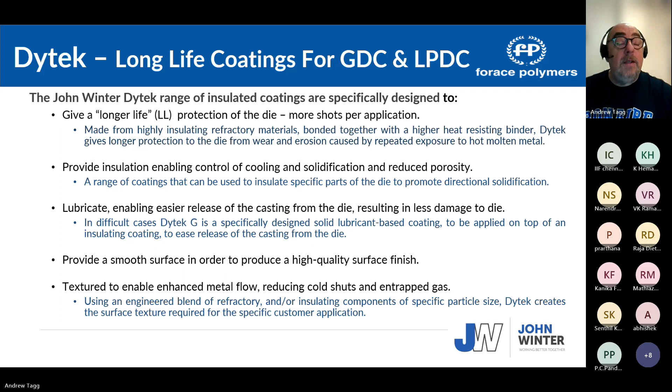So the range of die coatings suits most applications. They're designed to be sprayed directly onto the die using a simple pneumatic spray gun. The type of spray guns I prefer are the ones with the reservoir sat above, like those used when spraying cars. It's better with the reservoir above, because the person's hand will be manipulating different angles, and it keeps a constant supply of coating to the gun.

Most coatings are sprayed between 30 and 500 microns. In special cases, such as automotive wheels for four-wheelers produced by GDCs, the coatings can get as thick as 800, and I'll talk about that later.

The coatings are supplied as a thick liquid or paste, and they're usually diluted down with deionized water or soft water. Interestingly, only yesterday for the US, I got a question about whether not using deionized or soft water would cause a problem, and I said yes, it could.

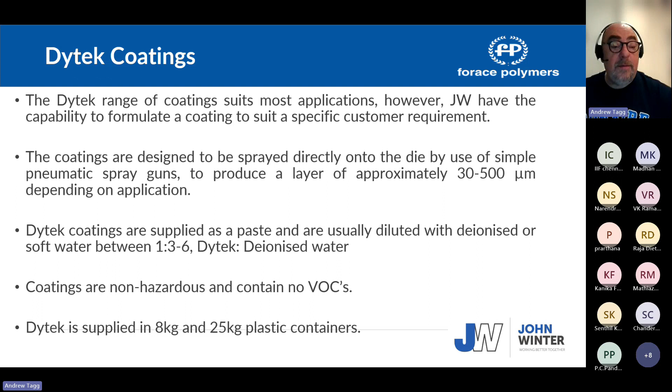Here's a range of die coatings, you see we have a whole range. I won't go through each one now, but I'll explain later each one's application, and the different range of die coatings for different applications.

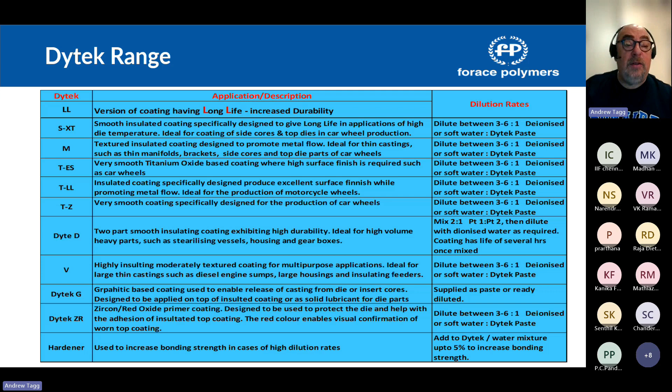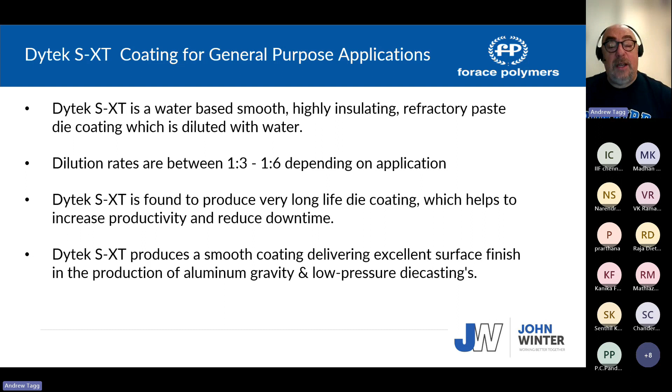Let me start with the first one: Dytek S-XT, a general smooth coating for general applications. It can be used on most die, gravity die or low pressure applications where the surface finish is good, but they don't need specific surface finishes like the face of car wheels where you require really high surface finish. So it's a general long life die coating that can be used on most applications.

Here's an example in the UK. You see the coating there, the die that's been sprayed, and the coating itself.

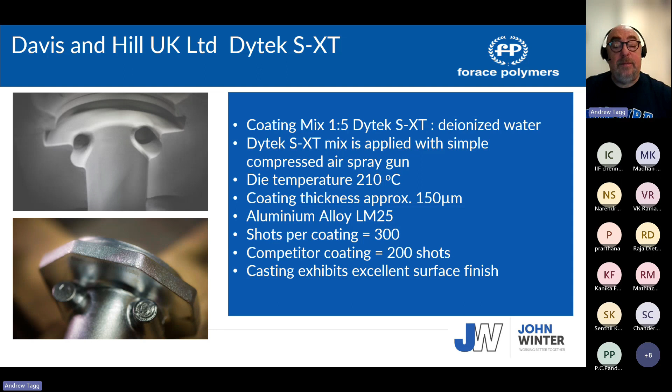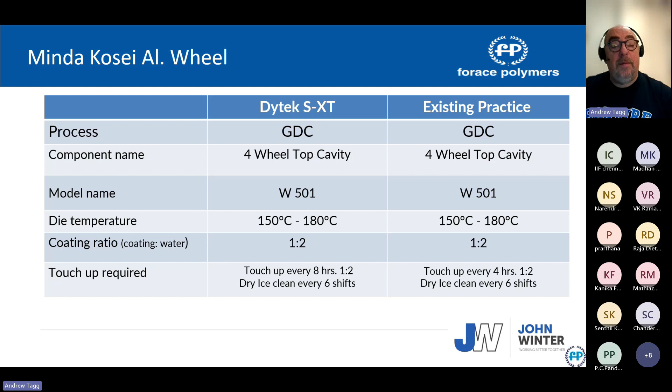Minda Kosei is an example of an automotive wheel application. This is GDC for a four-wheel car, a car wheel. You see the coatings applied there, which forms the internal part. That top part of the die forms the internal part of the casting.

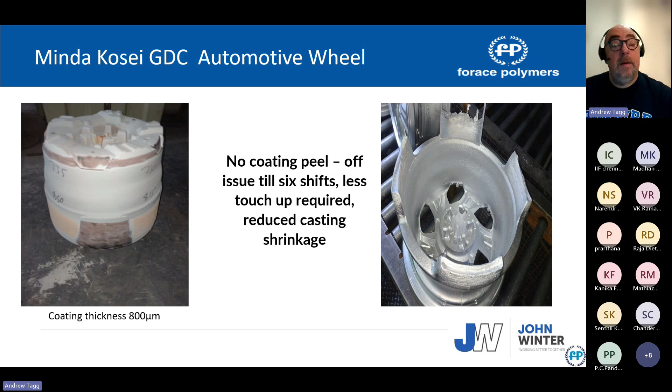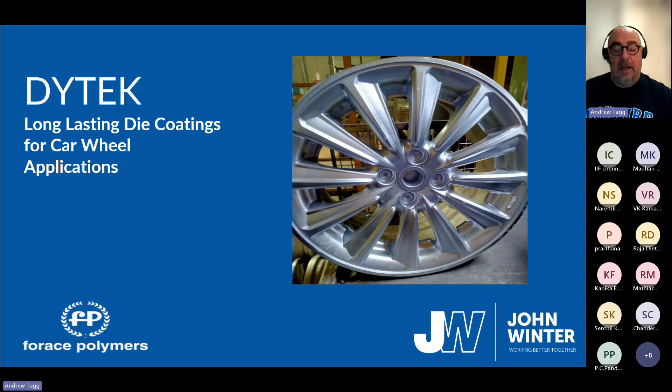Now the next range I want to talk about is car wheel applications. These are specific applications. Predominantly, most wheels are produced by LPDC. However, in India, there are a few plants that still produce them by GDC. So the application is completely different for both.

For automotive wheel applications, we have two coatings for the wheel face, and these are titanium oxide based coatings. This would be the bottom part of the die - it's the bit that forms the wheel. It has to be of very high surface finish, because the appearance of the car wheels plays a major role in people choosing to purchase the car or not.

Then we have Dytek ZR, which is a textured primer coating, sprayed predominantly not on the wheel face. It's sprayed on the side cores or side inserts and the top die, and then we use the S-XT as shown earlier on the top and side cores.

The Dytek V is specifically for feeding, and is specifically for only GDC. Low pressure wheels do not require feeding, but GDC does. So in this case, this is a riser coating.

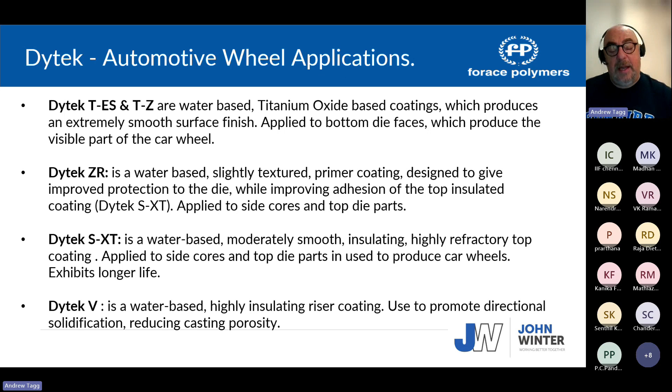So that's the four coating application that we would use for GDC. And LPDC is different - let me move on to that.

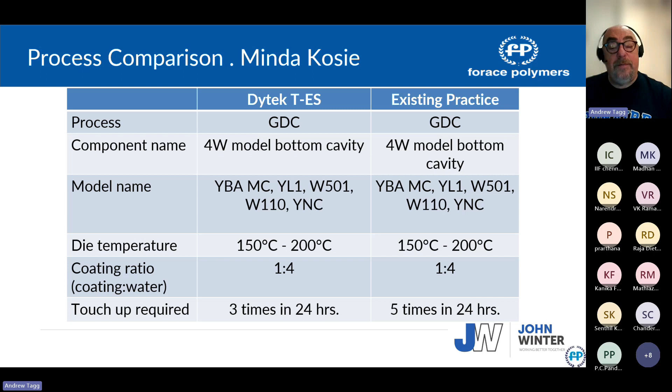Here's an example at Minda Kosei showing the application of TES. The customer got improved results with reduced number of touch-ups, which means reduced loss of production. You can see on the left is the coating, 30 microns, and the surface finish of the wheel.

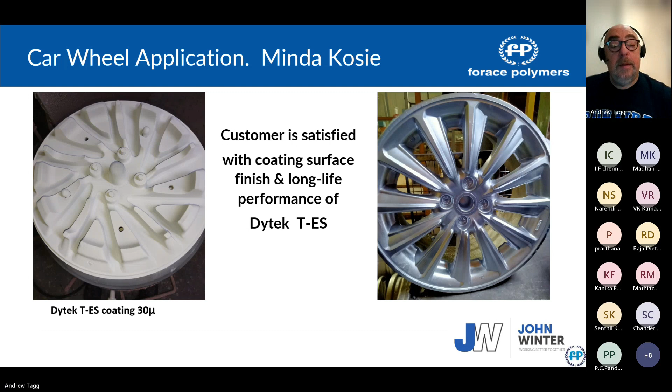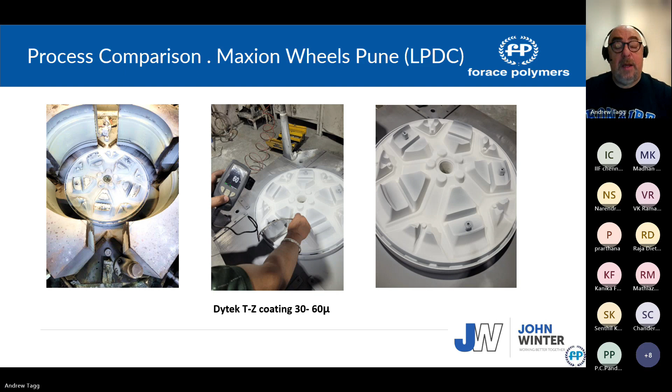Another one - this is Maxion, this is LPDC, where we use the TZ. We use the TZ more for low pressure wheels, and it's a bottom die face again. You'll see the pictures here - there's the bottom die face coated, and you can see the surface finish now. I enlarged that of the wheel - very high requirement for surface finish for these wheels.

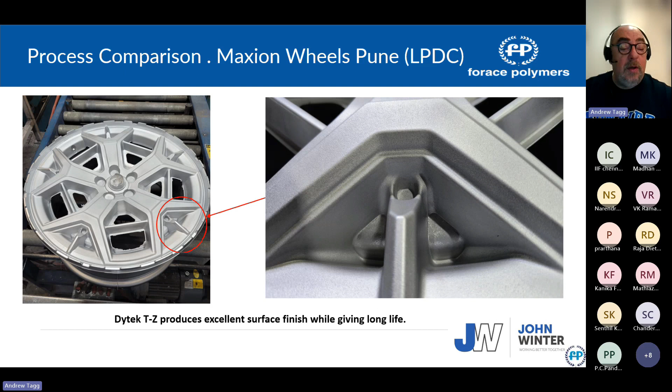The important bit, if I could go back one, was with our coating - you will see the big thing was the touch-up time. Basically, the original process, they were touched up 5 times in 24 hours. With ours, they were touched up 3 times in 24 hours. So again, you see the coating is longer life - it requires less touch-up, therefore more production.

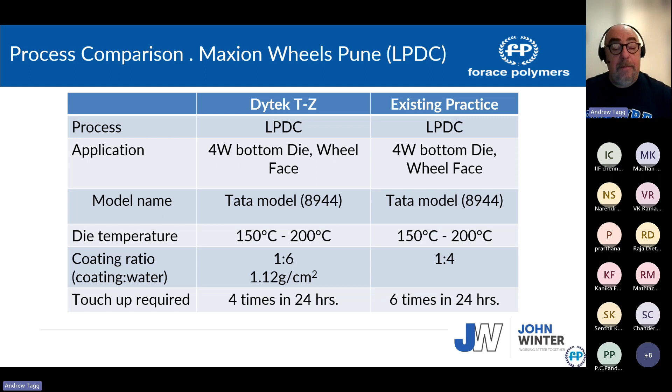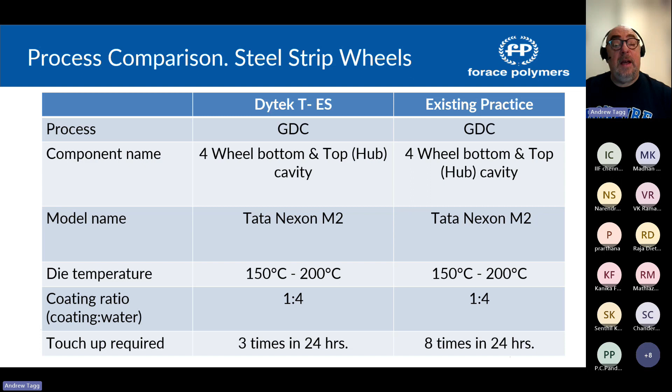And this is an example of steel strip wheels. Again, this is GDC, and it's T-ES application. You see the example there of the smooth coating on the wheel face.

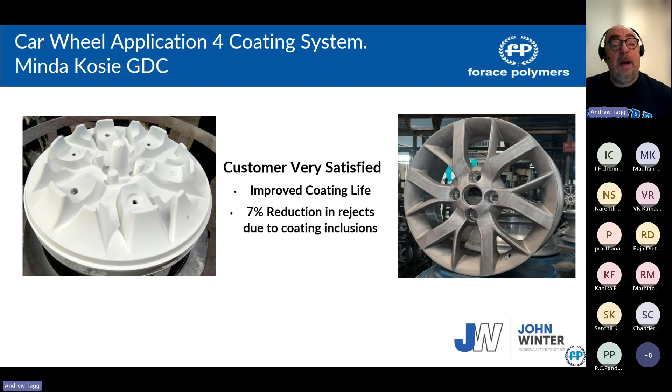And this is a 4 coating system for GDC. This is showing the wheel and the bottom die part, and this explains the process. On the top die, which is this part here, there's the primer coating - it's red, so it can show through when the other coating is wearing. Then on top of that, the S-XT, and this is built up to 800 microns, which is a concealment coating. The reason for that, I'll explain in a minute.

When you're making wheels with gravity die casting, the metal enters - I'll show a picture of the die - through the center into the bottom and goes up the sides. To stop shrinkage, you have to feed it from the top, and the result of that is you need a heavy insulated coating to enable directional solidification back to the risers. This is also why in this application we're adding a riser coating, which helps promote directional solidification.

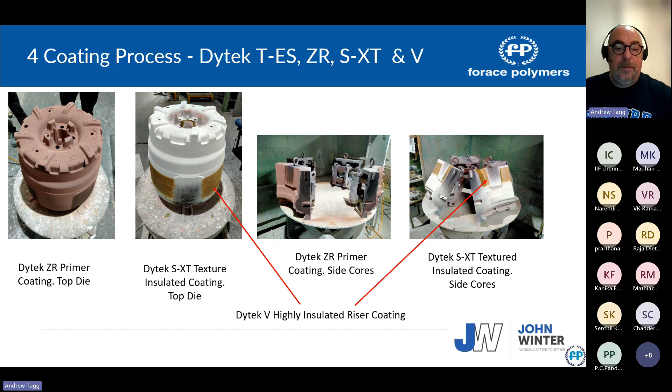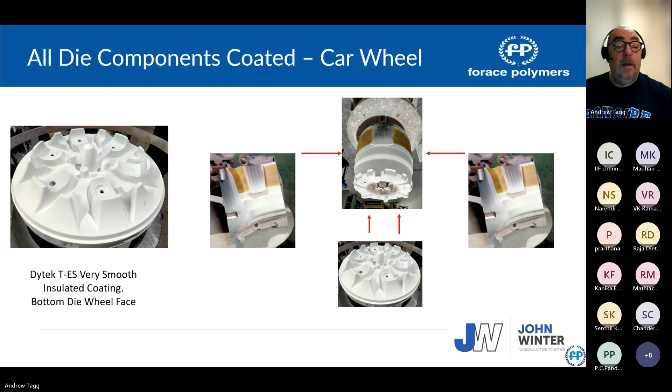So you see, I've done this schematic showing how it sits in the die. That's the bottom, that's the top, and these are the side cores. And these are the wheels. What would happen is this would have risers all around here, feeding into the bottom.

So it's essential that the top die and the side cores have a significant amount of insulation. These coatings are thicker than you would use in any other die casting application. 800 microns.

Sir, the presentation is not visible here. You can't see it? Oh, we are able to see it, sir. Presentation we are able to see. Okay, right, sir. Here it's not seen, but anyhow, people is important. Okay sir, you can continue. You can go out and come in again and see it, sir. Can everybody else see? Okay. One second. Yes, Andrew. Yes, sir, okay, visible. Yep, okay.

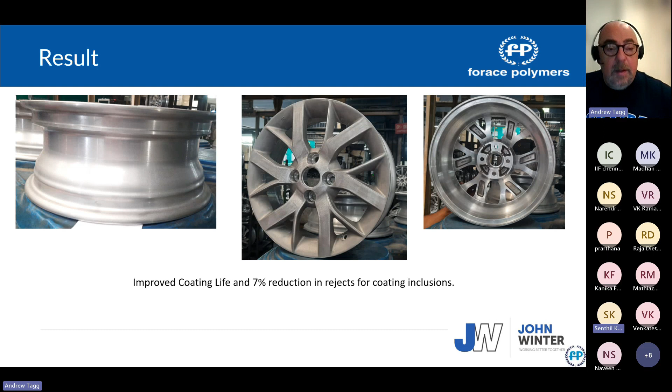So the next stage, we have a specific coating for motorcycle wheels, and the important thing with motorcycle wheels, unlike car wheels, is they have these thin little ribs in the coating. I'll admit I made a mistake when I first came to India with die coatings. We don't in the UK, and Europe, very few motorcycle wheels are made. So I had the guys at Forace, we worked together, and we supplied, the first trial was with a coating for car wheels, and it was disastrous because it was too smooth.

So we had to develop a coating specifically for motorcycle wheels that gives the right high surface finish, but enables the metal flow to fill these very thin web areas. These castings are quite prone to no-fill defects.

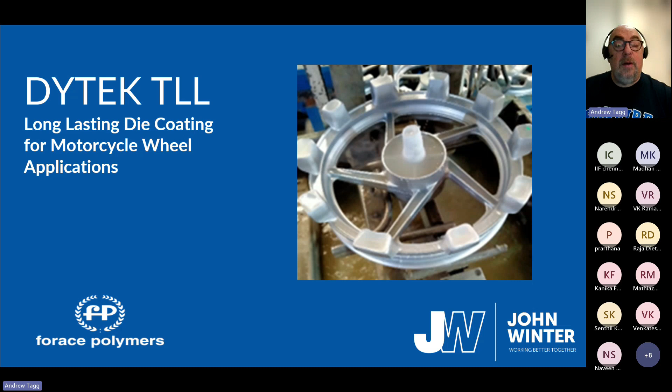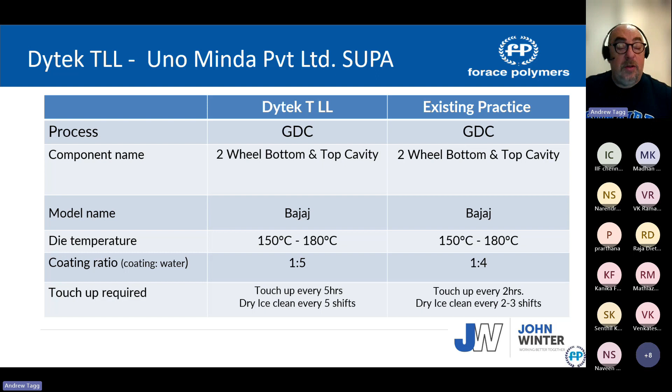So here's an example at Minda. It's a SUPA, about a Bajaj motorcycle wheel, I don't know. You see that we've touched up 1 in 5 hours compared to touch up 1 in 2 hours. You can see there's a top die, and again, this is gravity, and you can see the risers all the way around here.

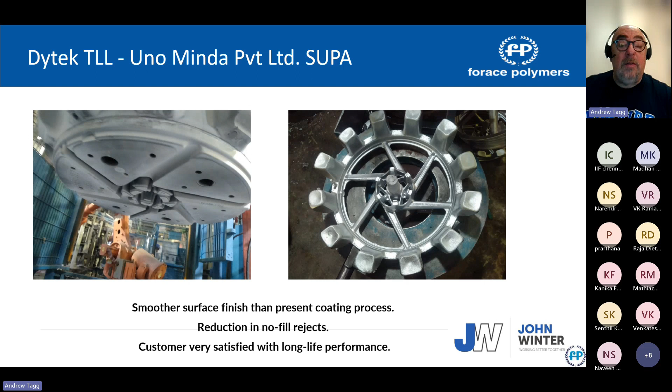With a big reduction in no-fill defects. He had a lot of no-fill in this center, this little center rib here and on these arms. So we reduced the no-fill defects.

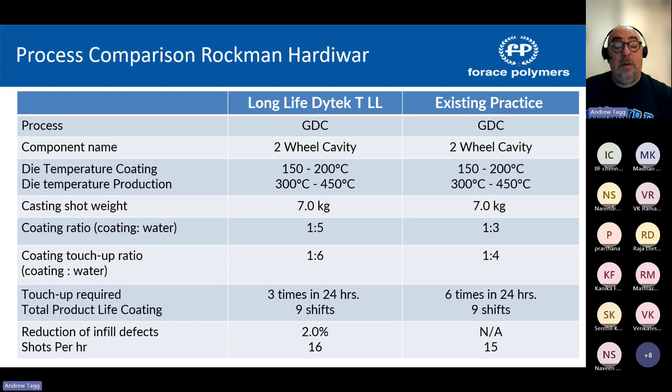This is a Rockman Hardiwar. Again, shots per hour increased, and the number of times touch-up was needed was only 3 times in 24 hours compared to 6. Again, this was prone to no-fill defects here, and again we reduced those defects.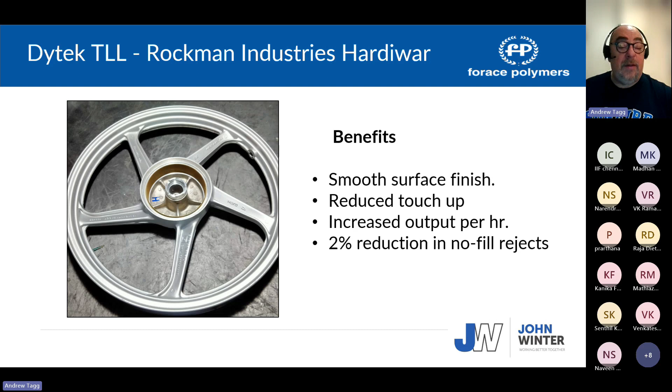And this is a classic wheel. Again, there's a coating, and again this had a certain problem in this area. The problem with gravity die casting compared to low pressure, if you imagine on a car wheel similarly, is the metal's entering here, traveling on here. So the metal entering this area is the coldest, and you have to promote directional solidification back from the feeders to the center hub.

So the insulating properties of the coating are very important. I'll show later, we introduced Dytek V in these areas where the risers are, and that helps shrinkage defects. So I'll move on to that later.

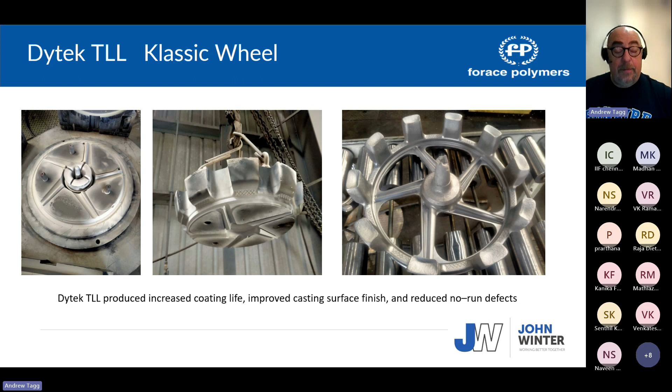Dytek M is a coating specifically designed, very textured, for thin section castings. When you've got a thin section casting, because the aluminium forms a strong meniscus, if you have too smooth a coating, two things happen: you can get entrapment of air, or you're not breaking the oxide film as the metal flows. So a smooth coating will impair the ability of the aluminium to flow. So for flat surfaces or surfaces of very thin section, you need a specific texture coating.

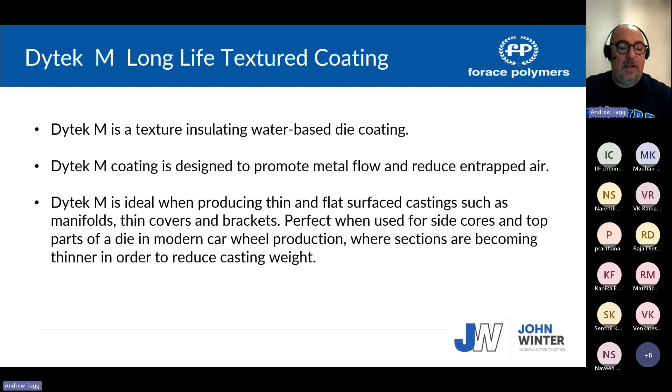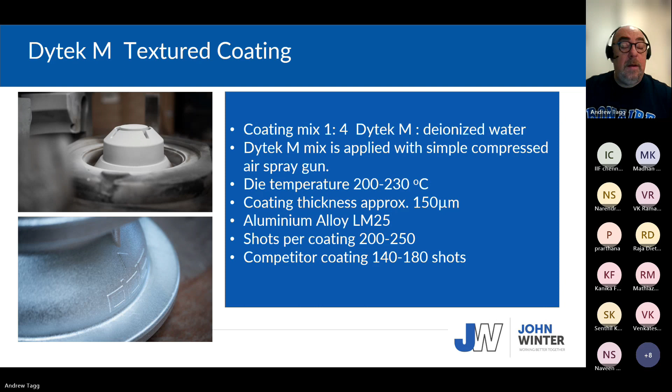So here's an example. You can see it's textured, this coating. This is a thin cover, exceptionally thin, like 3 millimeters, where we reduced the rejects from, they call it cold shuts in England, you guys call them no-fill, from 8% to 1% because of the enhanced flow characteristics.

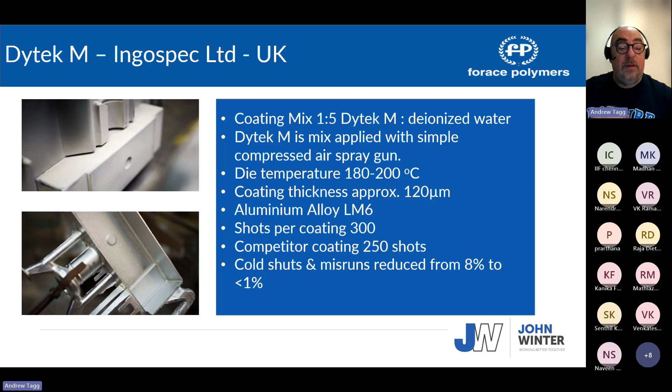This is a manifold casting. You can see there's Dytek M, and there's a competitive product. Coating life increased from 3 to 6 shifts. Again, it's very textured, so there's no misrun defects.

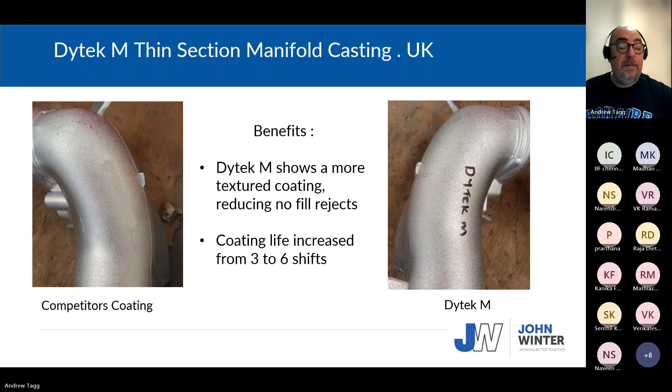This is a low pressure rear hub for, I think, a motorcycle. You can see these very small ribs there in thin sections. Again, the rework was reduced by 50% and reduced the misrun, or what you call no-fills, by 5%.

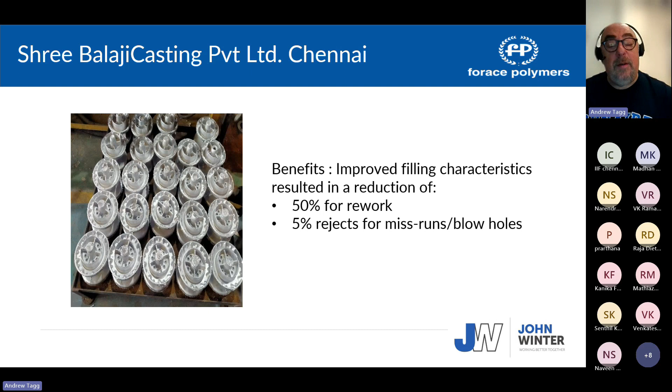And this is again an example of reduced misruns on a manifold casting.

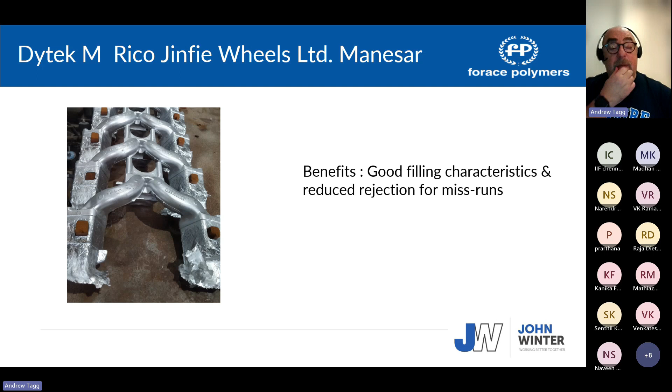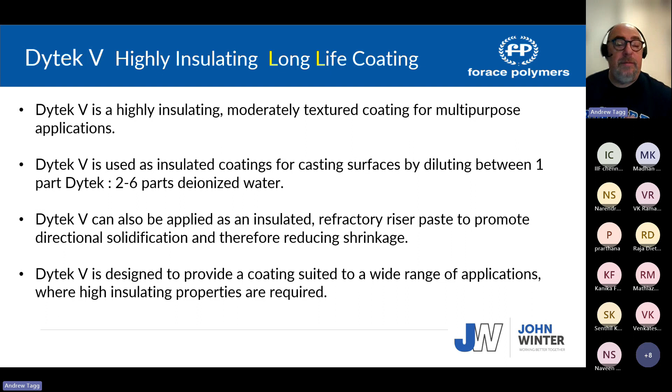Dytek V is a very interesting coating we produce. It's a highly insulated coating. It can be used for the cavity and also applied thickly as a riser coating, so you can enhance solidification.

The example here is a large diesel oil pan in the US. This is very large, probably about 1.5 meters long. It's for a Caterpillar, and the die coat is applied. It's what you call a tilt pour, where you fill the chamber, it tilts up, and the metal runs down the chamber. You need a very highly insulated coating for that application, and that's what is used in this case.

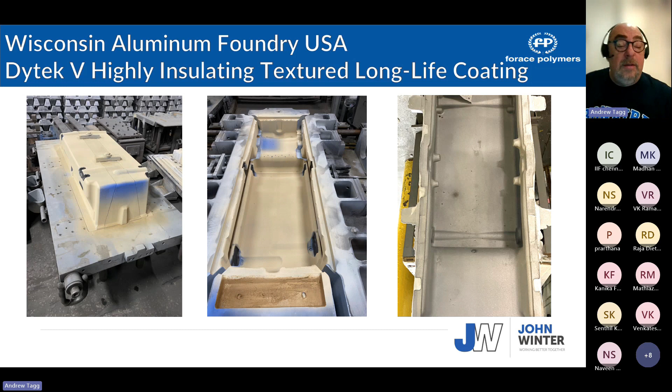I've put this on because it's quite interesting. I've put the link on there. There's an article in Casting Source about a revolutionary marine engine, and a Minnesota foundry called LaSalle developed the casting, a very intricate, very large, low pressure die casting.

They got the casting running, but had a problem with porosity in certain numbers of bosses. They switched to our Dytek V, and it solved the problem. We can't show the casting because they won't let you take pictures of it.

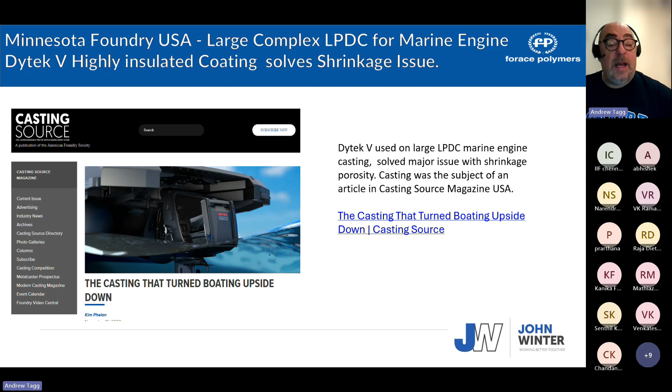However, if you want to look at that link, you can read the article in Casting Source. It explains how they designed the tooling and all that was involved to make this casting. They don't mention the Dytek V because they don't talk about die coatings, but we were asked about 3 or 4 months ago. They did the trials and resolved the shrinkage issues with that casting. So I thought I'd put that in so people understand the application for it.

Here's another application, Spark Minda. These yokes, I think for motorcycles, got a 5% reduction in no fill defects by using Dytek.

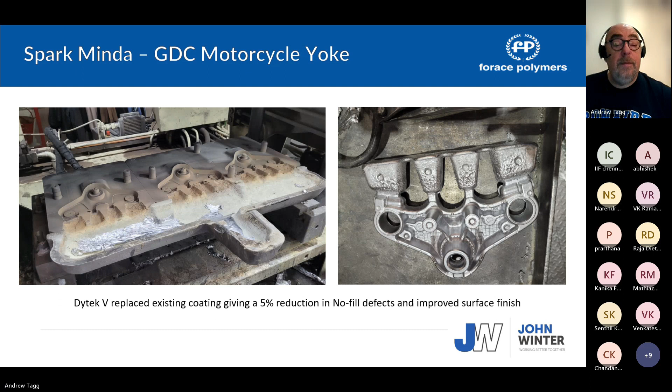This is where I talked about the motorcycle wheel. You can see we added the Dytek V as a riser coating, and we got a 7% reduction in shrinkage defects in the casting by insulating the risers. If anybody's there from the sand foundry side, it's akin to putting a sleeve in a sand mould. Basically, it's an insulating material.

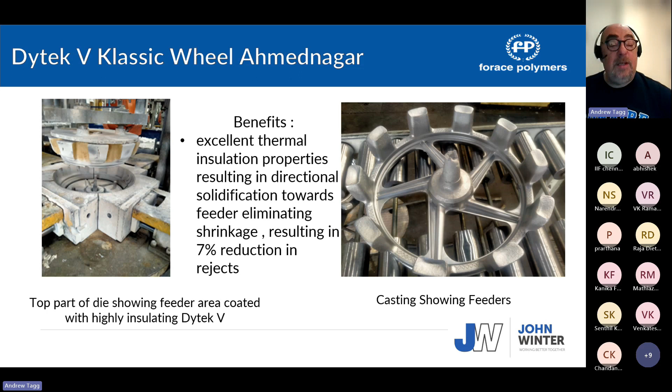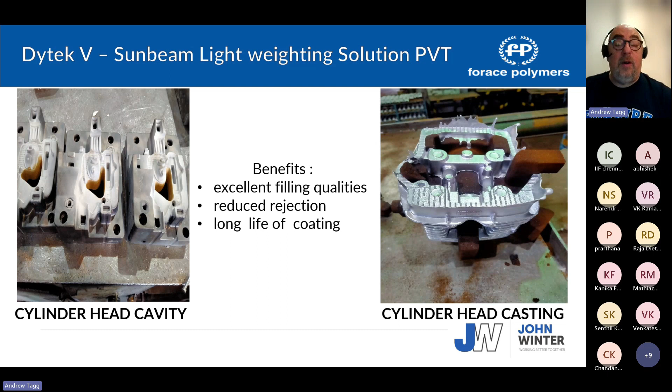Another example is a cylinder head, a motorcycle cylinder, for a four-cylinder low pressure die casting process. Again, we increase the flow of the metal in the casting.

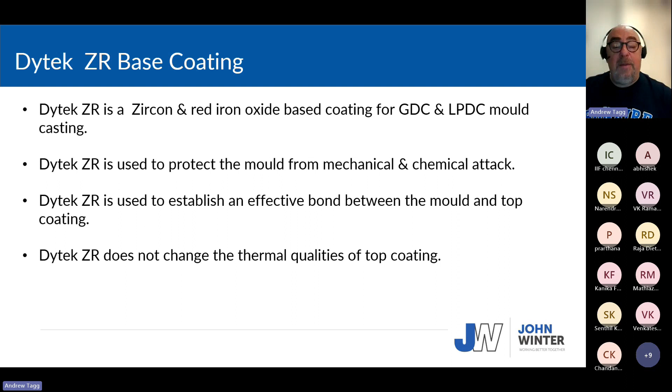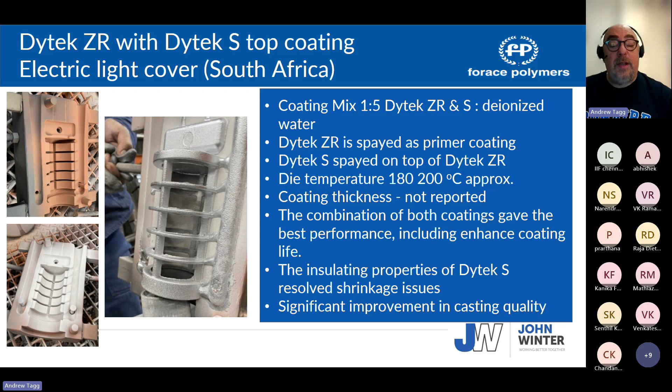Now we'll talk about our primer coating. This is used as a primer to enable the top coating to adhere better. As an example, in South Africa, it's some sort of light cover, and they use ZR first, and then they put the S on top of that.

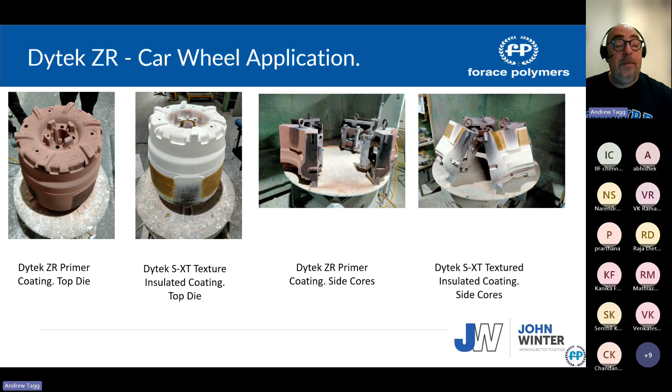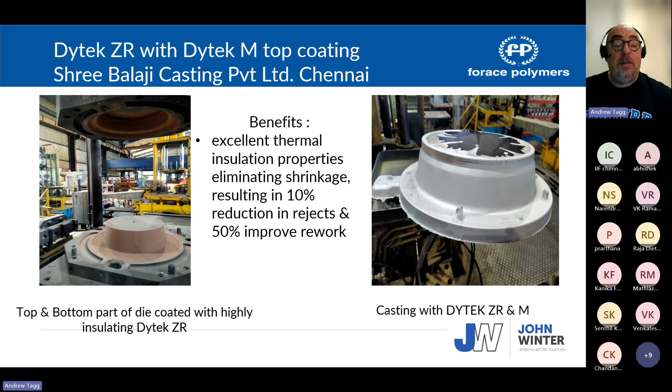This again is the car wheel application I explained. You've already seen that; we use it as a base coating there. And this was a casting where they used the Dytek ZR, and put M on top. It has some thin sections, and there's been a significant reduction in shrinkage because of that process.

The coating we're selling more and more in India is our Dytek D, a 2-part coating, because it has exceptionally long life. One thing I've noticed in India is the die temperatures run higher than in Europe, because of the ambient temperature in the country. Having a very durable coat is important here. It's a 2-part coating that gives a smooth surface finish but also gives you a very long die life, coating life.

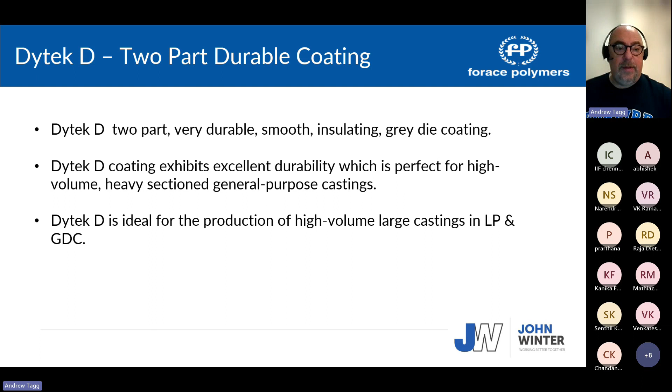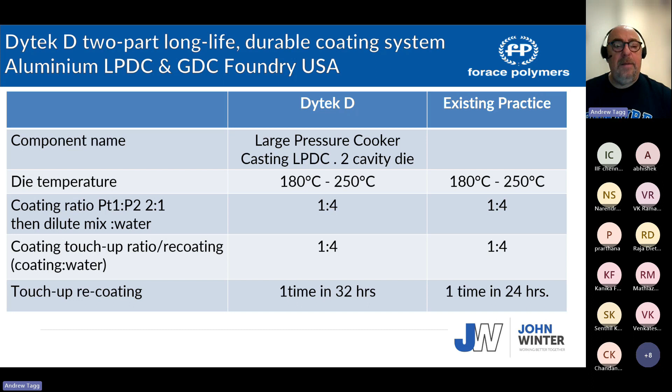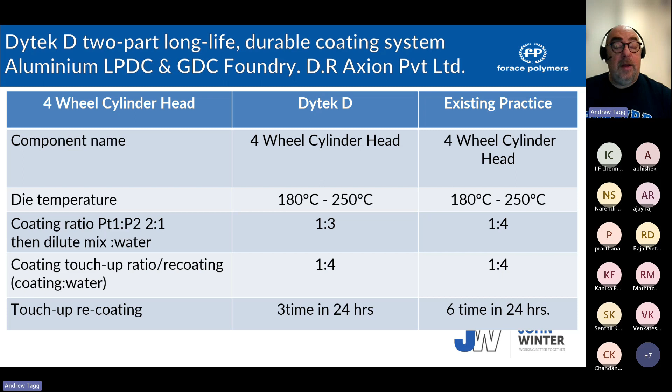And this is the cylinder head for a 4-wheeler. It makes you improve operation by using our Dytek D.

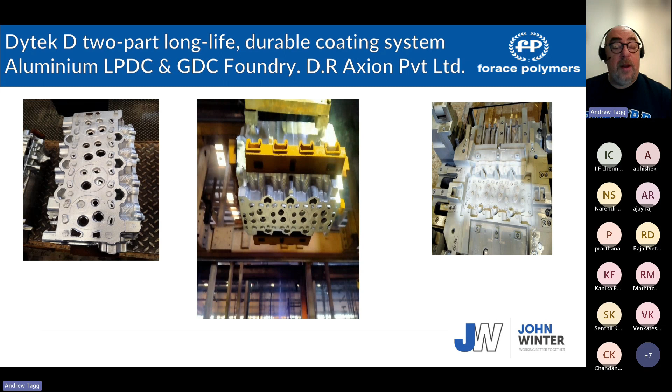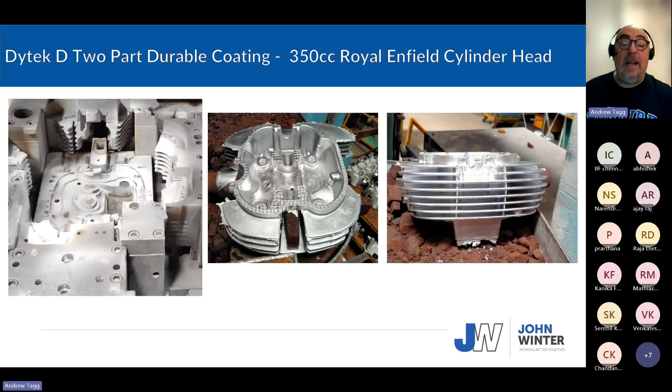We found it very useful in motorcycle cylinder heads. What happens is the fins make the casting difficult to remove from the die, and that tends to scuff the coating surface. They have to increase touch up in these areas, and the cavity gap to run the fin starts to reduce, resulting in an increase in no-run defects.

On the motorcycle results, we reduced the no-fill defects because the touch up interval had gone from 1 hour to 3 hours. So basically we reduced the number of touch ups to a third, and the resulting effect meant the closing up of the fin area was reduced, therefore a reduction in no-fill defects.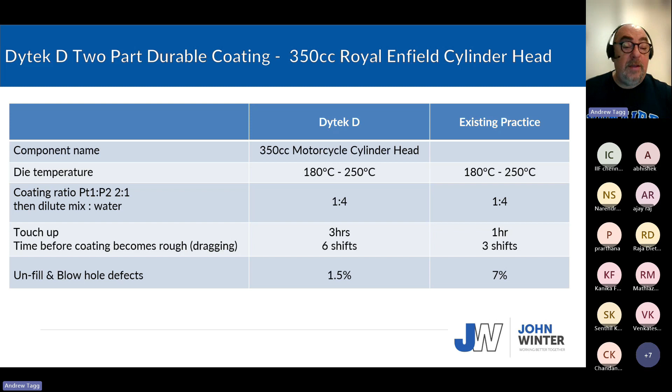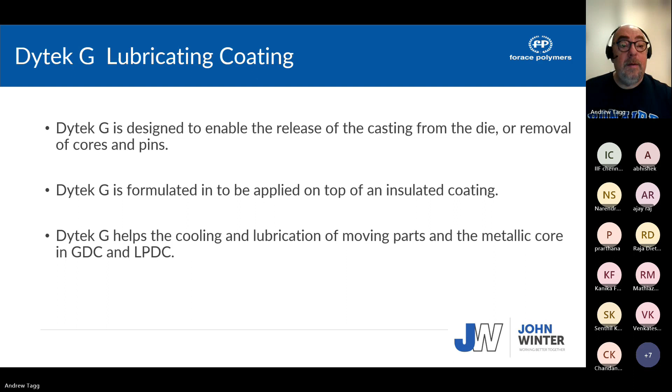We have a lubricating coating called Dytek G. Basically this is applied on a cavity - you would spray it on top of the insulator coating to assist removal of the casting for parts that are difficult to remove from a die. This was the cylinder head.

You can see the coating on the cavity there. It can also be used as a paste for lubricating metal inserts into the die. For example, if you're making a hollow fork casting for a motorcycle fork, the steel core that goes in to form the internal shape is coated in a solid lubricant like Dytek G, and that enables it to be removed from the casting.

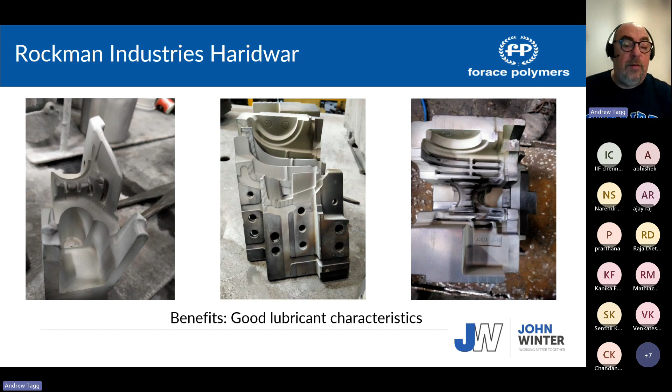So that's it. Any questions, anyone?

People hear me? Hello? Yes sir, can you hear me, people? Yes sir, yes sir, yeah. Anyone has any questions? Yeah, this is Venkat from Synergies.

Can I ask your mail ID so that I can communicate with you regarding some die coats which I need? For Chennai? Yeah, you can send an email to me or to the Forace representative. Do you have the Forace representative there? Yes, Andrew. Hello, Mr. Venkateshwar, tell me - Kanika this side from Forace Polymer. You can share your queries on mdoffice@foracepolymers.in - MD office at the rate of foracepolymers.in.

Very quiet, usually you guys are very talkative. So any questions for Mr. Andrew? There's a question actually in the chat box, Mr. Andrew. Let me bring up the chat box. I hate Teams chat. Here we go.